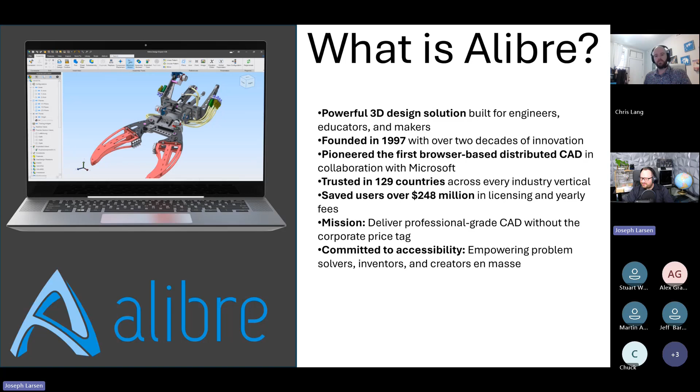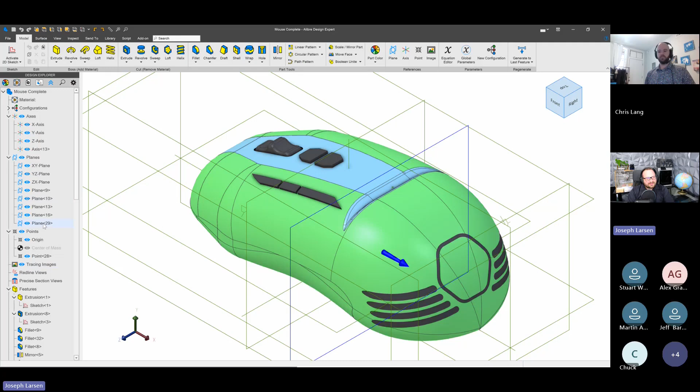Let's talk about some of the new features that we have. I'm going to open up a part here. Let's say I'm taking the role of an industrial designer or product designer, and I want to get my curvature just right. The straightforward way of doing that is with a loft. But who on this call hasn't had this situation where you're in a loft and it's not working out the way you want for one reason or another? It'd be great to have a different way of approaching it, and I think our new features here with fillets actually enable that.

So let's take a look at how this mouse was made. I first extrude this body, then cut the tip a little bit narrower and create a fillet here. And this is where we can start to see some of these new features come into play.

Our fillet tool is now separated into a constant radius and a variable radius fillet. When I click an edge, you can see a few things: the original edge is still preserved even though the fillet has been applied, so I can still reference the original spot on that edge, and then start setting custom sizes. Perhaps I'd like this to be 0.9, and then our fillet tapers from 0.5 to 0.9. Nothing new here, we've seen this in previous versions, but this is where it starts to get unique.

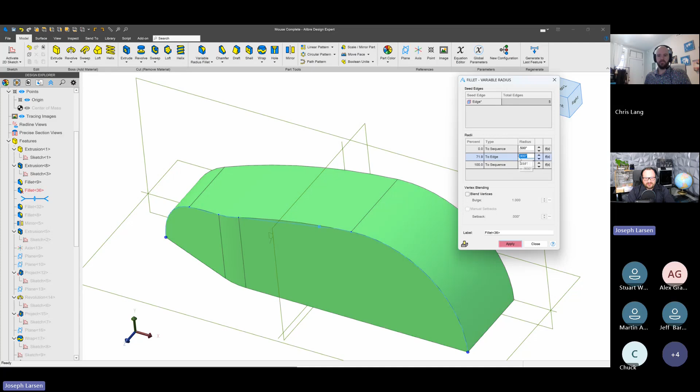Because I still have this edge here, I can click and place a point on that, and then say I'd like this to actually be on a different spot on this edge, maybe 71.9% through the length of this edge. I'll take this down to 0.5 so my fillet shows up again. And there I can see that at every point I click, I can define what radius I want—so it's not just start and end radii anymore.

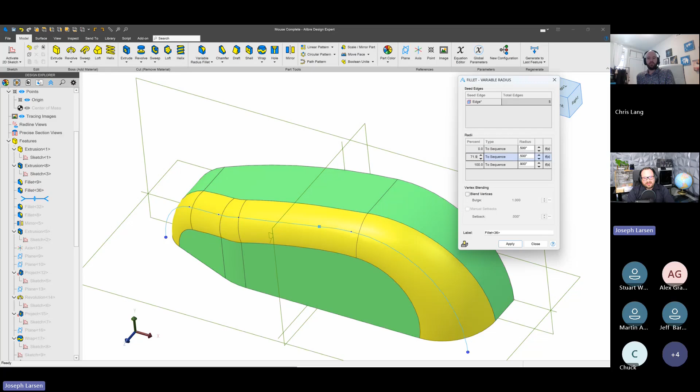I also have the option to change this to sequence. So instead of just choosing what percentage down this particular section of edge that I want, I can say I want this 53.5% down the entire sequence, or I can make this 71.9% down the entire sequence and be able to apply a pretty curvy fillet.

In this case, maybe I'll design this: I'll go 0.9 here, 0.9 here—actually I'll make that 1.1 so we grow a little bit larger, and then we'll go really large at 1.3. That's kind of the contour you'd see on a computer mouse. So we'll say okay to that.

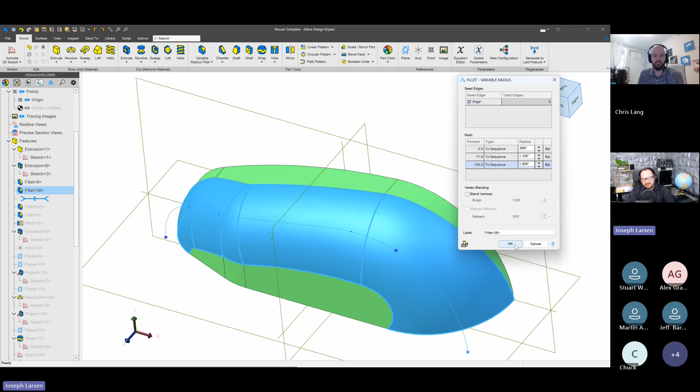Let's take a closer look by applying one more fillet. Maybe as a product or industrial designer, we'd want to apply something for a thumb to rest in. I'll advance this by changing my radius to somewhere around 0.05—a lot smaller—so we'll go 0.05, 0.05. And there we have a fillet all the way down the bottom.

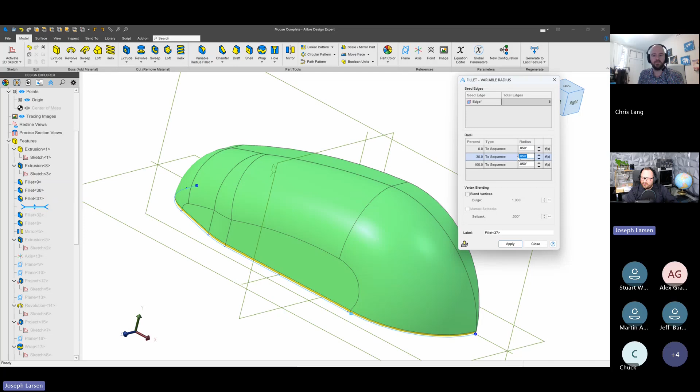I'm going to click another point, and I'll say in my entire sequence I'd like this point to rest 30% down the sequence, and grow this fillet to a size of say 0.4. Let's add another one—add another point. We'll assign this to the sequence, and we'll make this 0.4 as well.

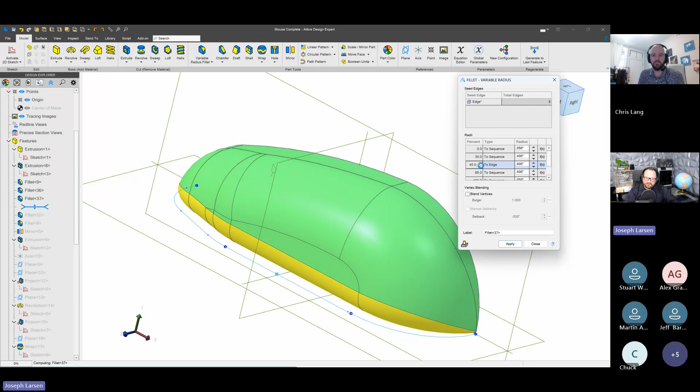Oh, but that's what percentage—so I'll say 65% through the sequence, add a size of 0.4. And then we'll add one final point, and I'll say I want this to be exactly 40% through at a size of 0.75. And there we were able to make a contour that looks much more mouse-like.

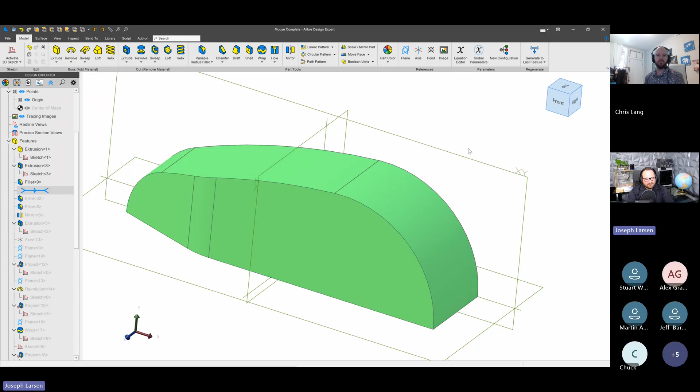So when we look at previous versions of Alibre, to come up with curvature like this, even with our loft tools, it would be very, very difficult to take an approach like this in the past. But now we can make full mouse bodies and other great things pretty easily using these variable radius fillets. And there, of course, is a finished product.

But let's take a closer look, because variable radius fillets are certainly not the only things we have in this updated fillet tool. Here we have a bottle—we might think of this as a laundry detergent bottle or an antifreeze bottle, something that sits on a shelf. If we're the product designers, of course we care a lot about how it looks, because we want our products to look great on shelves.

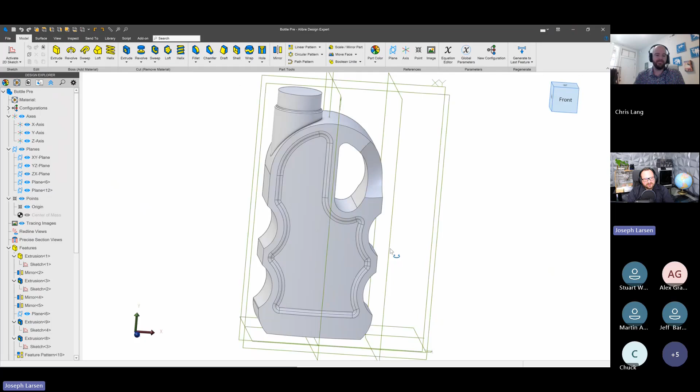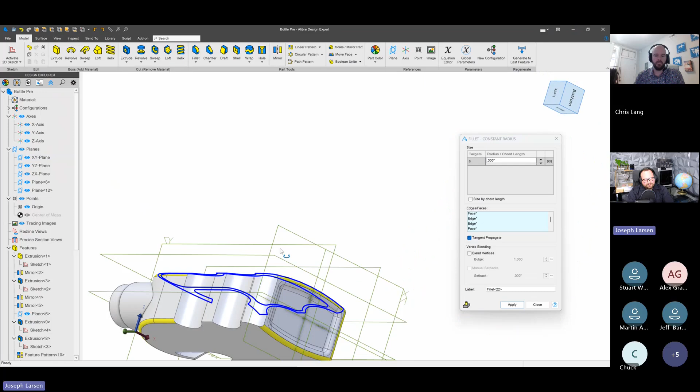So I'll make a fillet, and I'll make this 0.3 in size, and I can start choosing some faces and edges to apply my fillets. Now, when I look at making these fillets, I kind of want to ask myself: does this appear to be bottle-like, particularly where our fillets intersect at these vertices? Could we do something even better? With the new features in Alibre, I think we certainly can.

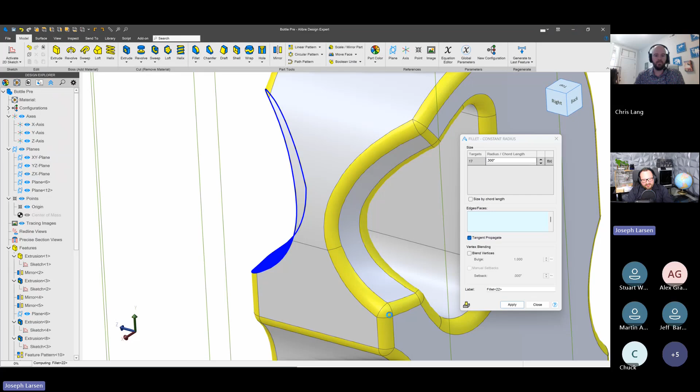So we'll tell that to fillet, and on this other side—I'm asking a lot of fillets in one feature, so this might slow down a little bit—but these seem a little too square to be convincingly bottle edges, I think. So let's take a look at what we can do. I'm going to choose this blend vertices option, and we'll take a look at how these corners change as we blend the vertices.

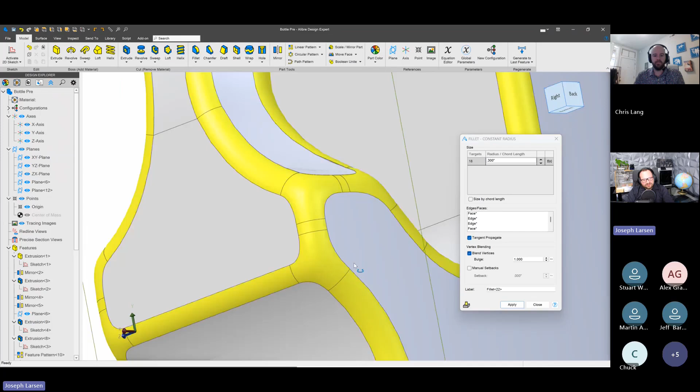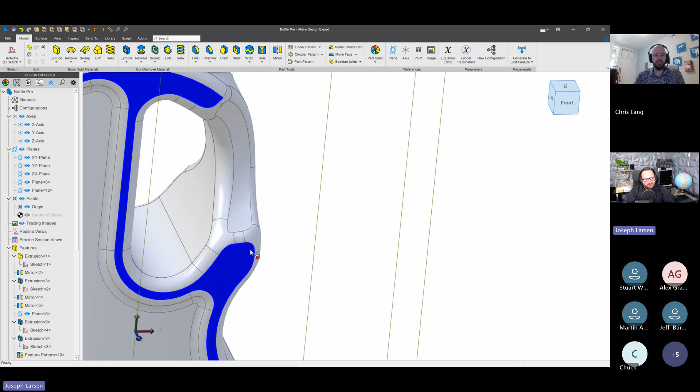There you can see we've been able to stretch our fillets out quite a lot and get more bottle-like, smooth transitions that I think do us a lot of favors. I can even change the bulge on this, so I'll make a very small number and apply that fillet, and these bulges will flatten out slightly, so we can adjust how these transitions work. Very exciting for a lot of applications, especially if you care about flow and want things to flow smoothly. It can be a real lifesaver.

Now let's finish up by putting a fillet around this neck. So I'll add a fillet. We'll make this 0.275, but if we're concerned with something looking good on a shelf, it does look kind of strange to have the fillet seem large over here and small over here, and we really want something more well-behaved.

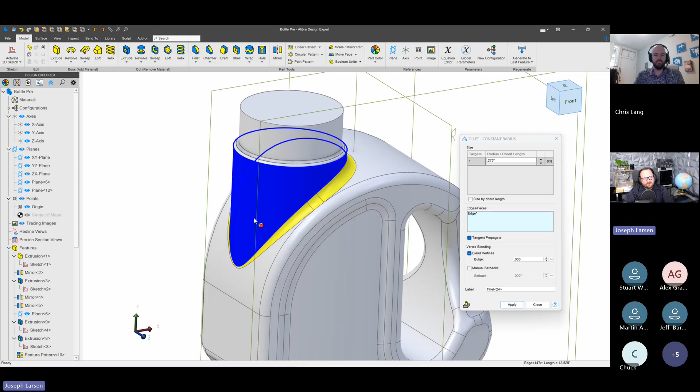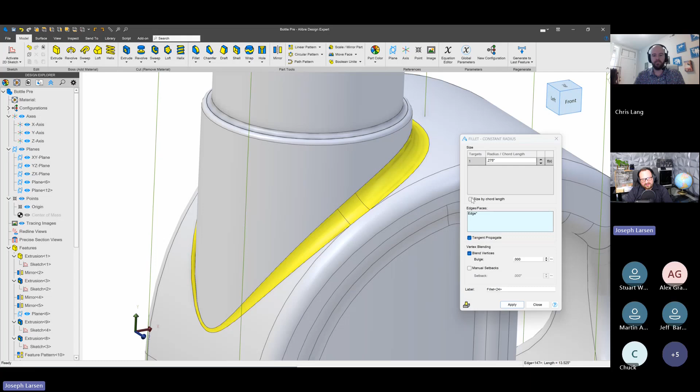But fortunately, in this new release, we have size by chord length options. The chord would be the tangent point on one side of the fillet, drawing a straight line to the tangent point on the other side of the fillet, and that's chord length. So instead of having a radius of 0.275, we tell the fillet to have a chord length of 0.275, and go to whatever radius it needs to satisfy that. When I size by chord length, you can see how much more well-behaved and consistent that fillet is all the way around. I'll go ahead and apply that.

And then I'm going to shell this top face out to make sure that we are actually dealing with a hollow bottle. We'll give that a thickness of 0.05 and apply that.

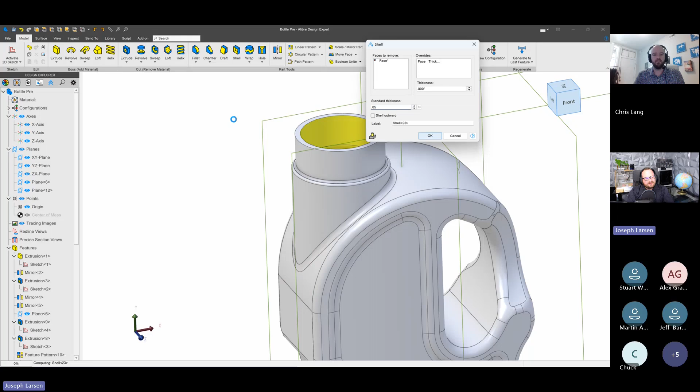I'll quickly cut this open here to confirm that we are dealing with a hollow, constant thickness bottle. And there we are.

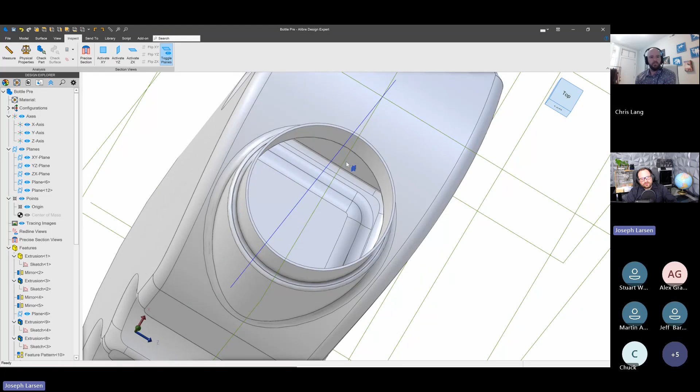And I may want to view some of the internal parts of this bottle, but you can tell even with slight movements of my mouse, we are moving around quite a lot. Fortunately, Alibre has a few tricks up its sleeve in this new release when we try to look at things like internal features. If I hold the space bar down on my mouse, look how easily and smoothly I'm able to see the internal features by moving my mouse.

So holding the space bar down gives you a very fine view adjustment, but there are additionally more tools in our system options to be able to view our models with.

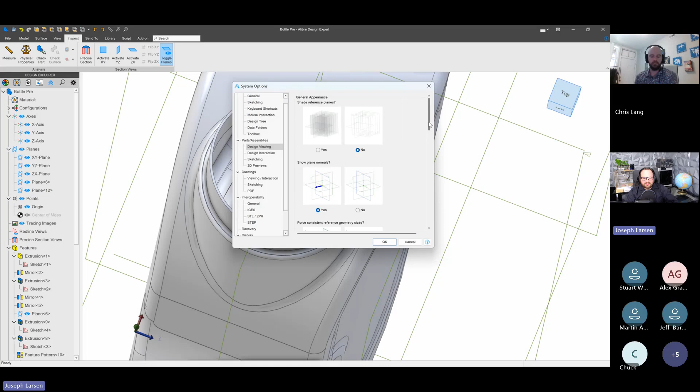First, you can see that when I hover my mouse over a line or an edge, I have a nice thick highlight there, and I can change that to be a thinner highlight if that's my preference.

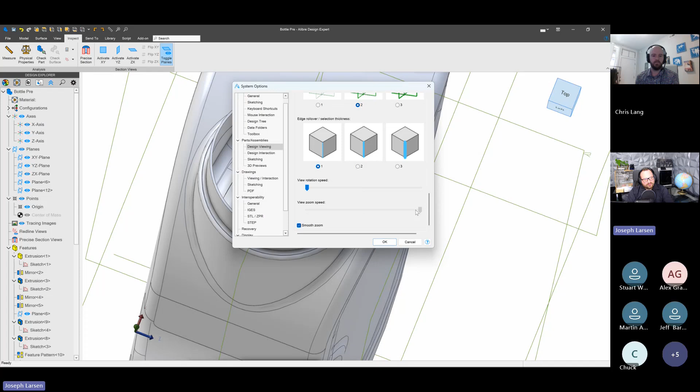Not only can we do that, but I'll head back to design viewing and I can adjust my rotation speed. I can take my rotation and zoom speed down. You can see I have a much more fine zoom and an easier rotation speed, so you're able to fine-tune the way that you view your designs in this latest dot release.

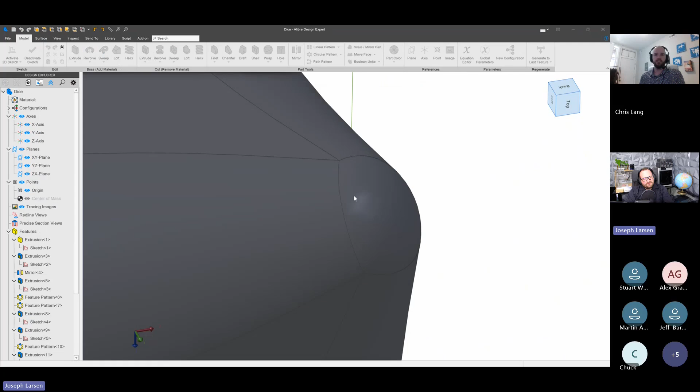Let me pull up one more example. I'm going to pull up a dice here. And there you can see we have a good view of our corner, and I'll go ahead and edit my fillet. Now, it's not just blend vertices that make a big difference, but we also have manual setbacks.

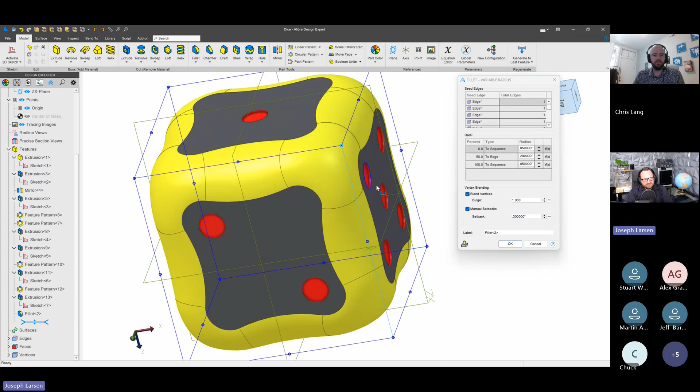So watch these corners closely as I say I want my setback to be 0.3 instead of 0.05. And as I make this bigger, the entire dice has a change in corner. So we can very finely control the way that we set back our dice.

And I can also adjust my bulge. If I want pointier corners, I can give that a value of 2. Or if I want the corners to be quite flat, I can give this a value of 0.0001 or something really small, and we get kind of an interesting final product. That'd be kind of a fun dice to roll.

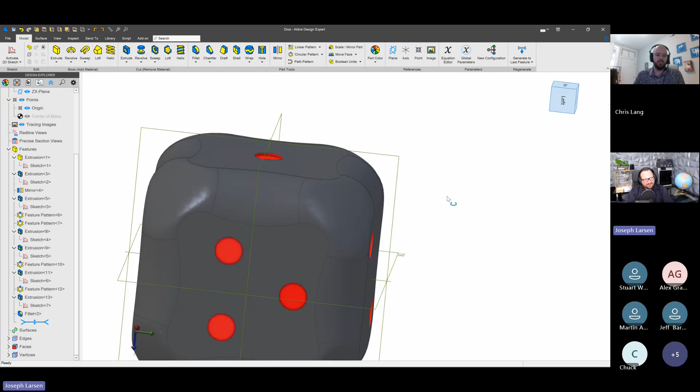Now there are some new features that aren't having to do with fillets, so let me pull up one of those. Let's say that I'm a mechanical engineer designing a crankshaft, and of course with crankshafts it's all about balance.

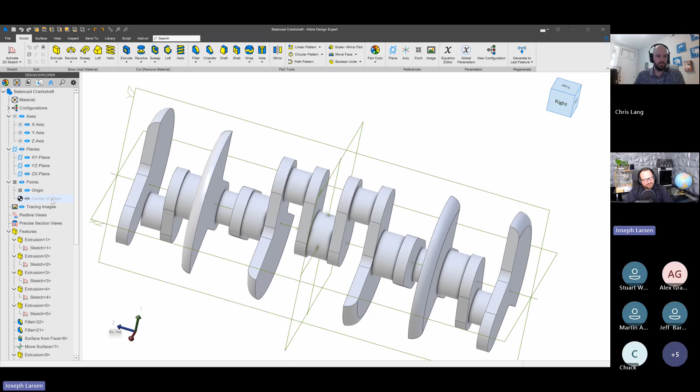So if I want to take a look at maybe how well balanced this crankshaft is, I have this new option in my tree to look at center of mass. I'll go ahead and show that point, and there I can see how the center of mass falls right on the origin, which is what we want. But I also have the ability to roll back and see if my individual throw is balanced, and I can see that it's kind of off there.

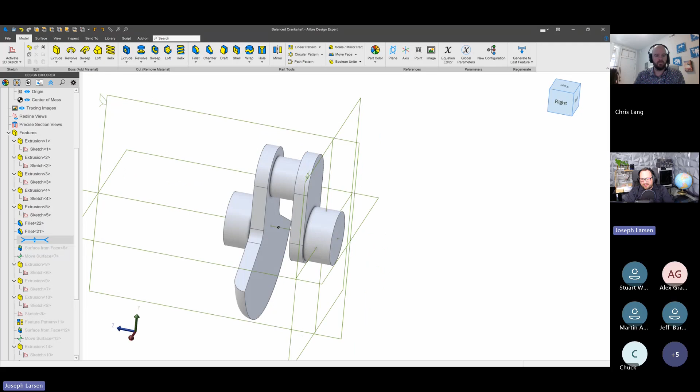So this is a great way to double check if your math works or if something needs fine tuning. Perhaps I go back to the drawing board and I redesign a new crankshaft, and I can double check that one by showing my center of mass.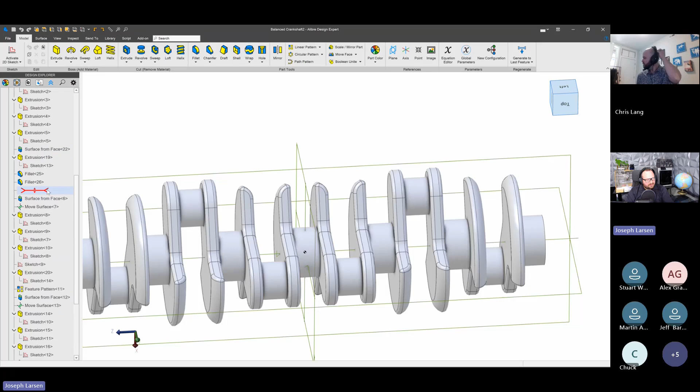Still loading up here. There we go. And yep, thank goodness it's at our origin. I'll roll it back here and look at one throw, and that looks much more centered. So we can design, iterate, and improve, and even in the drawing environment, we can dimension off of our centers of mass in the new version of Alibre.

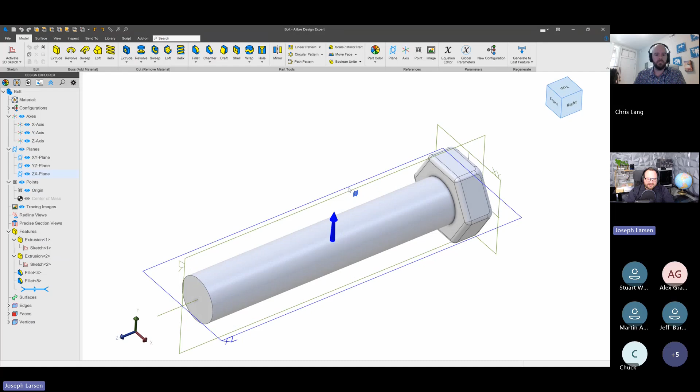Let's pull up something else here. This is beautiful as far as CAD goes because it is simple, it is not graphics intensive. This is a great representation of a bolt. But if you're 3D printing, you may want to have something a little more, in this case, threads.

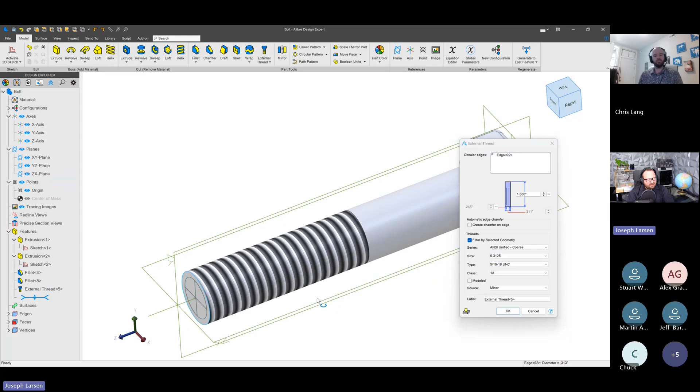So in this new version of Alibre, we have both our hole and our external tools that have been updated with some new features. We'll choose a circular edge here, and I can choose a thread series, right? Perhaps I want ANSI coarse, 5/16, and we have a cosmetic thread just like in the last version.

But in this case, I'm able to click this modeled checkbox and physical threads show up right there. Now, in this case, these are nominal threads, so they'll be the same size as internal threads, not that practical for real life use, but we also can choose, say, average, and you can see how the threads adjust size there. Every thread spec is going to give you maxes and min dimensions, and so average is right in the middle of max and min for production threads, which is a pretty good place to be.

But 3D printers tend to overbuild too. So if your 3D printer is putting too much material down, we also have a minimum material option that shrinks the thread even further. And it's the minimum that you can have in that thread standard. And if you want to fine tune some things and maybe run it through a die or a tap yourself, you can choose a max material and get the max material within that standard as well. So these are all very, very great tools to be able to fine tune the threads that you want exactly.

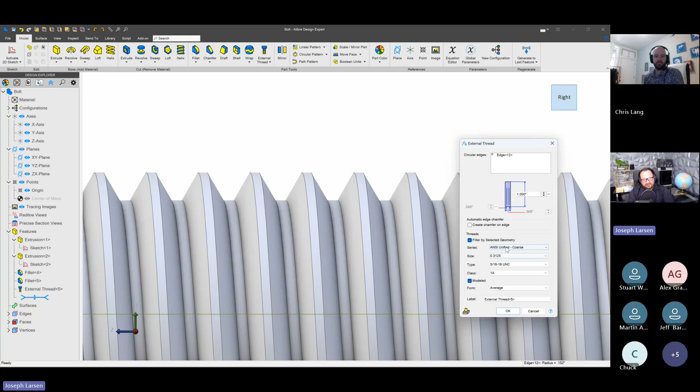And there are even some custom threads that you can add as well if you'd like to have your own thread standards that don't show up in Alibre, and have them be modeled in real time right before your eyes as well. Let's move on.

I have a hummingbird feeder that I think is a pretty fun thing. And I'm not sure why I locked that target location. So let me pull that up here.

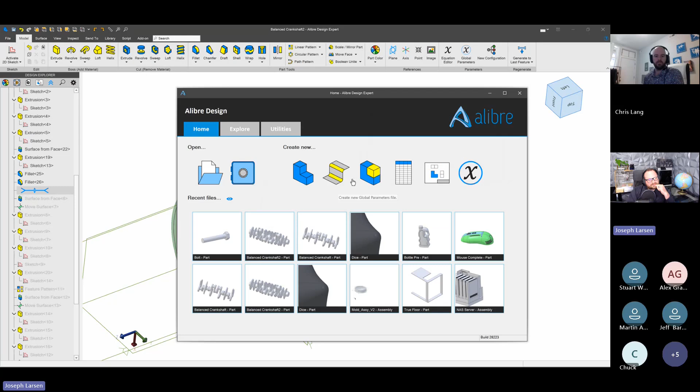This might be open from the last time, so I'll just be sure to close everything down in Alibre. Hmm. Yeah, strange. Okay, let me pull that up in the background.

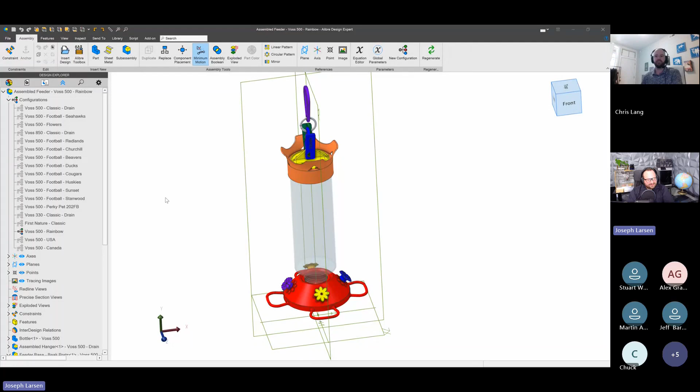So I've got a hummingbird feeder here, and you'll notice we have a threaded interface and a whole lot of configurations. Maybe I like the classic, I'll activate that. Or maybe I'm a football fan and I'll go for the Huskies. No matter what we do, we have a lot of configurations we might want to prioritize. We've added the ability to simply drag the order of the configurations we'd like to have, so that makes configurations very easy to work with.

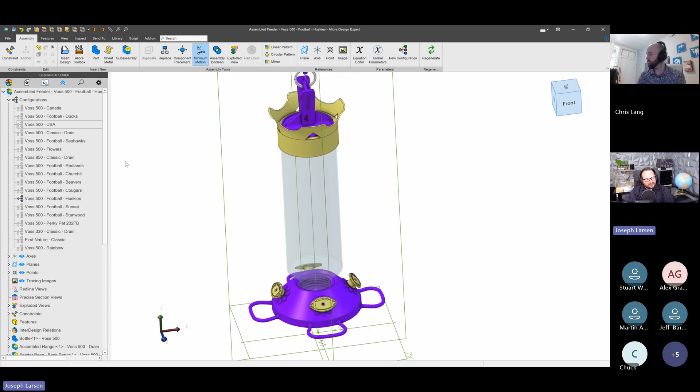You'll notice that this little insert here can be adjusted. I'll take this to a separate window and we'll see what internal threads look like. Currently this has been made with a simple sweep, and you can see if I bring up the sketch, it ends right there at the bottom. Pretty good, but I think our tool can make things even easier.

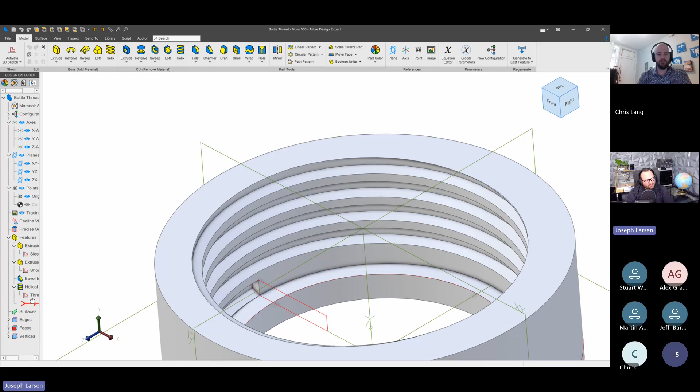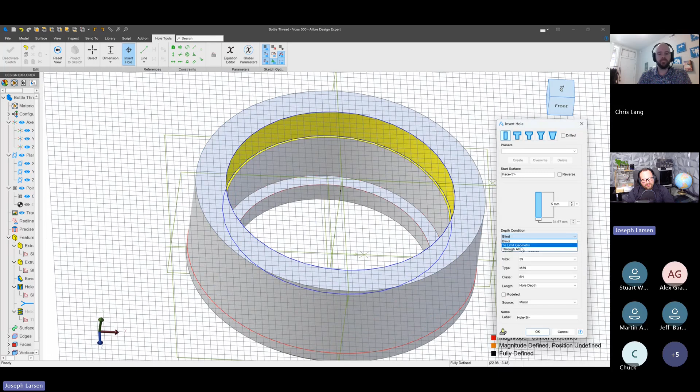I'll go ahead and roll this back before our helical sweep, and we'll activate the hole tool. So I'll select what face I'd like my hole on, and perhaps I would like to have the ISO threads, maybe ISO coarse M39. There it is. I'll click on my origin to place the hole. Here I can say to limit geometry and use this face to limit exactly where my hole stops. And of course, I want to see these threads, so I'll click on the modeled icon, and there they are. You can see that transition.

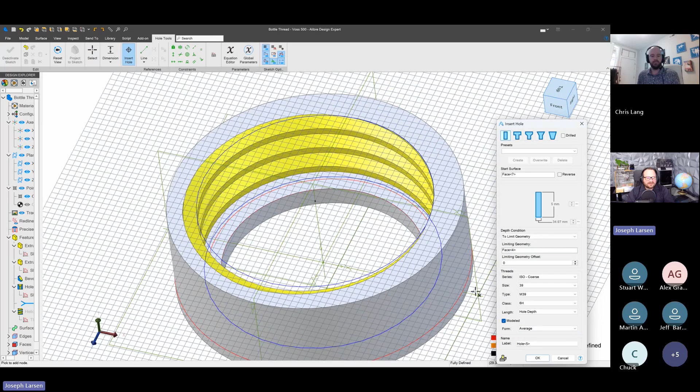I think it's a lot more smooth than it was before. And if I ever need to come and update these threads, I simply change some settings in here. I can go to a different thread very quickly, and I don't need to edit my sketches to do so. So again, this is great for 3D printing. It can make a pretty picture, but that's pretty computationally heavy, so just be careful how you use this tool so your computer doesn't run too slow.

Next, maybe I want to point out or find certain things that have to do with this. Here is a magnifying glass icon that we've added into the Design Explorer. As I click on it, I can maybe search for a drain, and sure enough, everything that matches that is shown here. I can search for a plane or any number of other things and be able to find it.

Now, because it's so easy to search for things, we want to make it also easy to rename things. So maybe I can choose something here and add to the name. Simply by double clicking in the tree, we can rename various tree items.

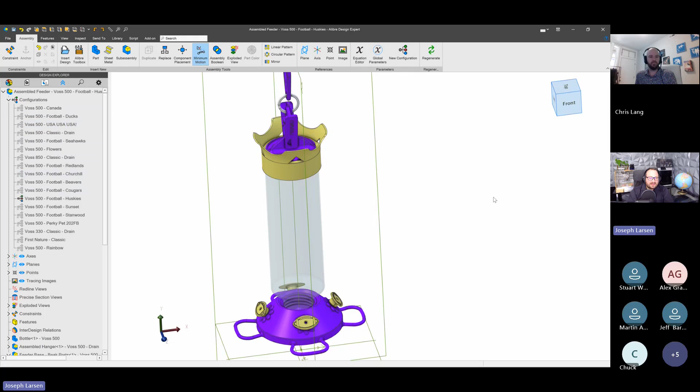Now, let's say that I've gone through this and we feel all good about it. I'll go ahead and save my changes. And then I want to send this to a drawing. So I'll go to Send To, make a drawing of this design, and we can take a look at some of the updates that we have in the drawing environment.

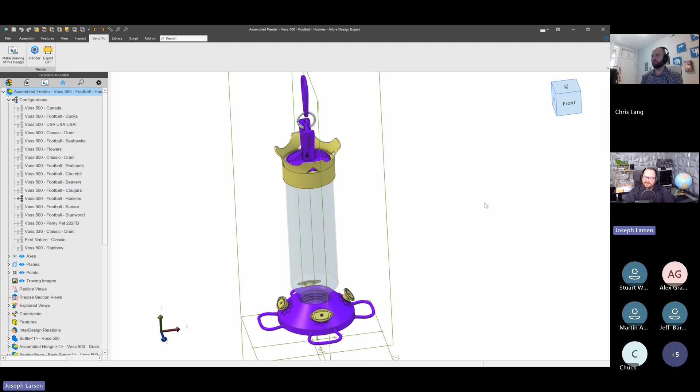As I pull up this view, I think one of my favorite things to adjust is the new datums. So we'll go ahead and accept that. Let's say that we've gone up and down our model and have decided that the best thing we can do is take that very bottom face here and assign it to datum A. So we're going to pull up our datum, we're going to pull up datum A. Of course, our datum almost always goes into the right orientation, but every once in a blue moon, this arrow might be pointed up in the wrong way.

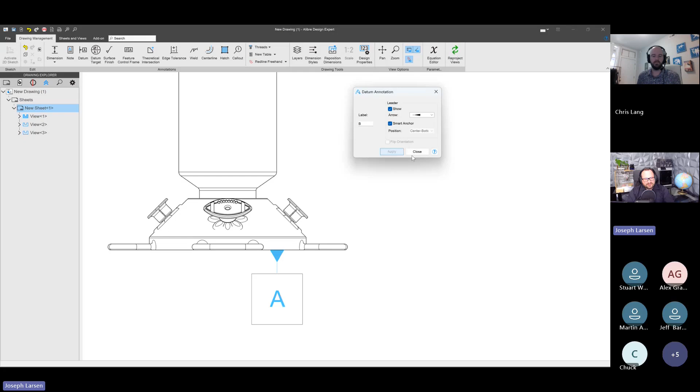But here we have the ability to flip the orientation so that if it's wrong, we can correct it immediately. Either you've never had this problem or it's been a big challenge, but either way, now we're able to customize our datum locations.

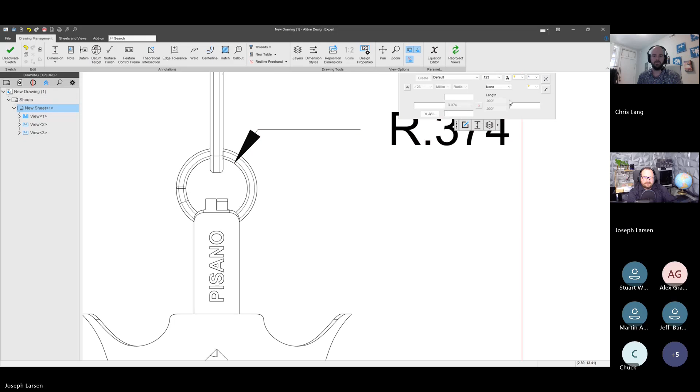In addition, as we go to draw this up, maybe I want to make a special dimension and have a note on it. And so when I go to change this dimension, you'll notice we have much wider boxes that we can input information in. And so whatever I'd like to append, I can clearly see in that box.

And now let's look at that leader line. Maybe per some internal standards or personal preferences or whatever we want to say, this horizontal line is just too long. Well, now we are able to adjust that.

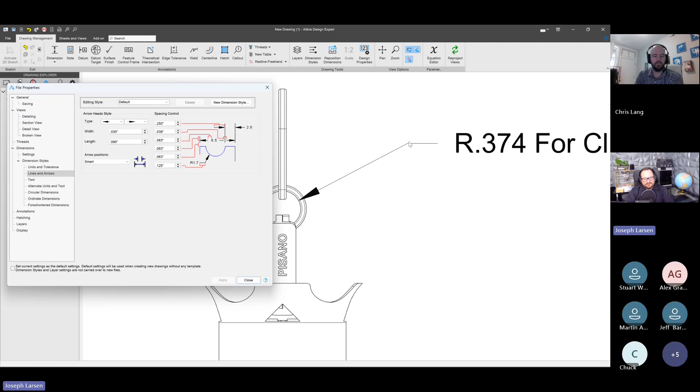So we'll go to System, actually File Properties, and then Lines and Arrows, and I'll change this to 0.125, and we'll take a look at this horizontal line as I apply this change. You can see that line shrinks significantly, so we can make that line whatever length we want, and we'll still be good. Those are some of my favorite updates in the drawing environment.

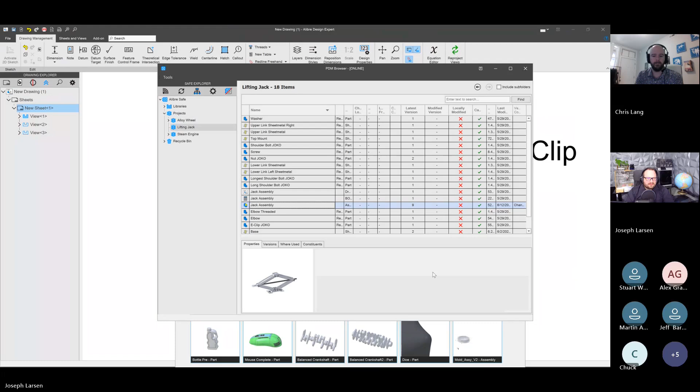But we also have some PDM updates that I'd like to go through with you as well. So I'll pull back up my Alibre home screen and open up my PDM browser. Now here I have a project for a lifting jack, and I'll go ahead and open up the assembly for it. And so I've got this full jack assembly.

I want to perhaps reposition it or make some changes. And when we're all done, I'll click on Save. Now I'll select my option to check in to safe, and now we're ready to see our first enhancement to the PDM, and that is version comments. Right here in our check-in screen, I have my version comment that I can add.

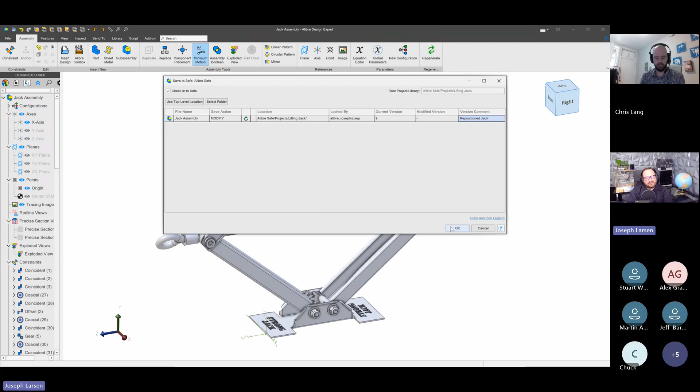And so when you're working in a collaborative environment, the goal often is to document your work as well as possible, and we want to make sure that you can do that with the least amount of effort. By being able to directly version comment as you check in, that should save a lot of time and effort without having to navigate through the PDM to find our versions and add comments like that.

Well, maybe we've run this through manufacturing, they love it, we're ready to release it. We want to revision it. Well, we're currently on revision 4, so I'll right click and add revision. And you'll notice that it automatically numbers up to revision 5.

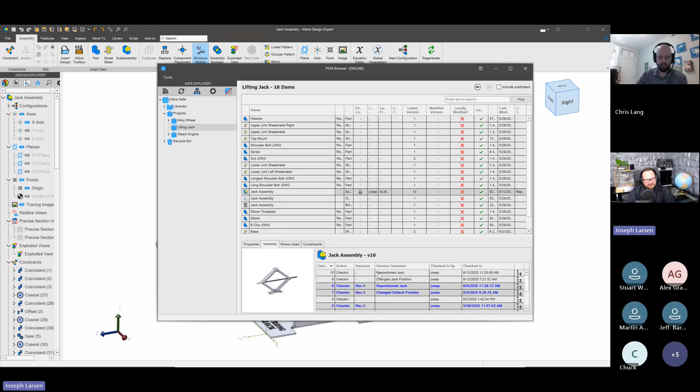Now, before we'd have to go through our custom properties and find some variable for revision and try to do it that way. But here, simply right click and add revision is a new feature that should save a lot of time and keep things organized.

We also, you'll notice my little X here. I want to make sure that I close my jack. Not sure what happened there, but we also have the option to go to revision B or some other letter or whatever value we want. And I'll go ahead and apply that change.

Now, let's say that I want to delete something, right? Let's say I want to delete this part here. I'll go to delete, but you'll see that it is stopping me from being able to delete some things. And it's of course because this file is being referenced by my assembly, and if I delete it, it'll break my assembly.

But it's not always straightforward, especially when you have many subassemblies, what is being referenced by what. But now we have the ability to click on this magnifying glass, and we can see that this nut, which is version 1, is used in the assembly versions 1 and 2, and then version 2 of this nut is being used in versions 3 through 10 of the assembly. So we can see a complete story of how everything is being used, where and when.

And you'll see that this interface shows up in multiple places within the PDM. So that is a wonderful enhancement to avoid the frustration of wanting to delete something and not having a straightforward path of where or how to delete it.

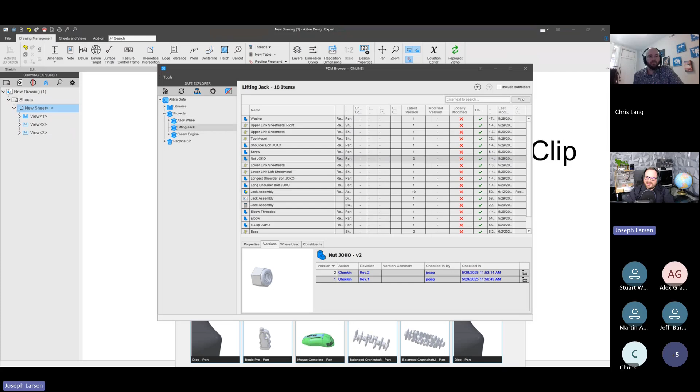Now, we've already covered how to get Alibre, how to upgrade, and all that. So I think we could probably turn this over to Q&A. What have we got? Larry has been making some great comments.

The first one I want to highlight: please do not go away from perpetual licenses. I agree—I think that's the best thing any software company could do, because typically when you buy something, you get to keep it; you don't have to keep buying it over and over again. I think that's something Alibre really stands for, holding on to the perpetual style of licensing. Obviously, like Chris said, you can buy the update if you need it, but you're buying what we have. And if we add new stuff, like every company does, then it's a good idea to get that update.

Joseph, this is a good question for you—he's asking about electrical discharge machining with the thread tool. Are you familiar with that? EDM, yes. I have no personal experience with EDM, but this does allow you to have the full thread profile, so I wouldn't see a problem with being able to do that. I imagine the EDM machine would just need a STEP file or something similar that has the full defined thread on it, and that's what we're able to provide here.

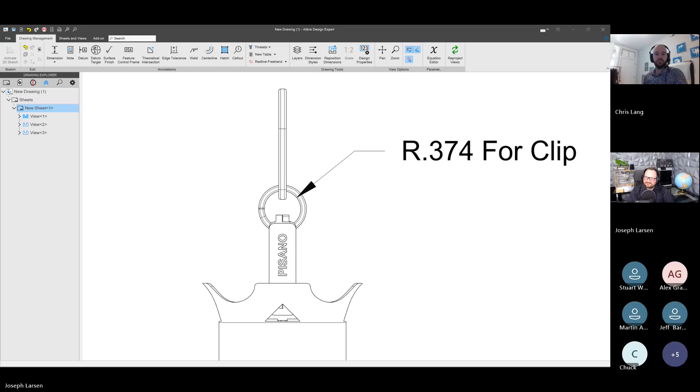Does anybody else have any questions that we can answer? Don't see any currently, but let's give it a few minutes and see. If we don't, here's Chris's contact—feel free to reach out to him if you have any questions or need any updates, and he'll be happy to help. I think we've got a question coming in here... maybe not.

We see Larry—he's been a longtime user, and we're seeing some comments today, and I completely agree. This was a really exciting release for me, so it's been wonderful to present it with everybody. Yeah, when they said it was a dot release, I was like, really?